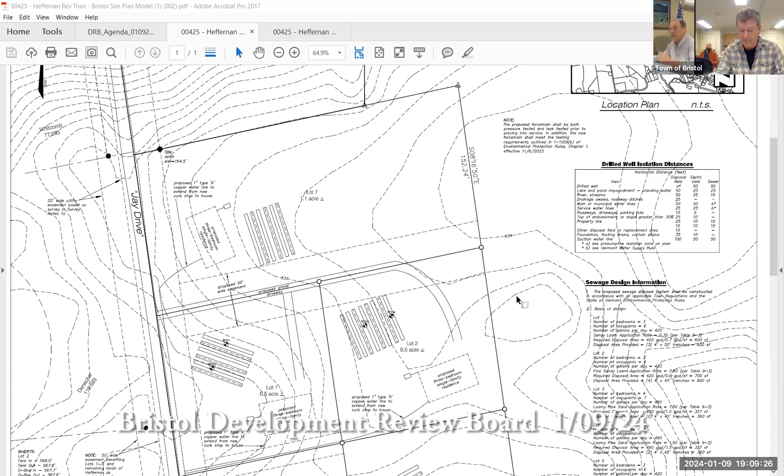As you can see, 2 of the lots will require mound systems, the rest are all conventional. Let me get to those. So the mounds are where? Lot 6, I see, and lot 7. 6 up front and 7 in the back. Yep, just how the soils fell. All right, so Carol, our minute taker, isn't here tonight, she'll be looking at the tape. All right, we'll make sure I forward her all the materials and repeat things too. So, lot 7 and lot 6 are mound systems, the other lots are in-ground, all conventional systems. Yes, okay.

So, as the state requires, they have the proposed building windows, which can alter a little bit, but that's more than likely. Lot 7 might change it, I would think, depending on, as long as it meets the zoning requirements and the state requirements, the state's gonna issue it. Let me just put on the record for Carol that this is in VR, Village Residential District. Minimum lot size in VR is 10,000 square feet, so that's roughly a quarter acre. So all of these lots are of sufficient size. Yes, they're all basically double what they need to be. Yep, and 7 is 4 times.

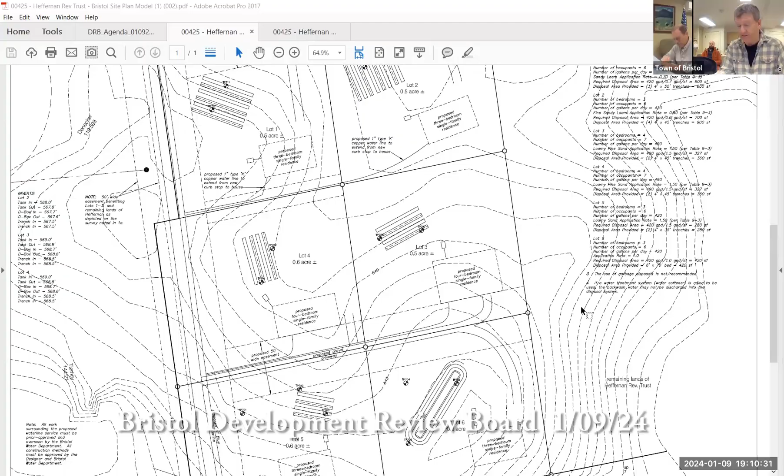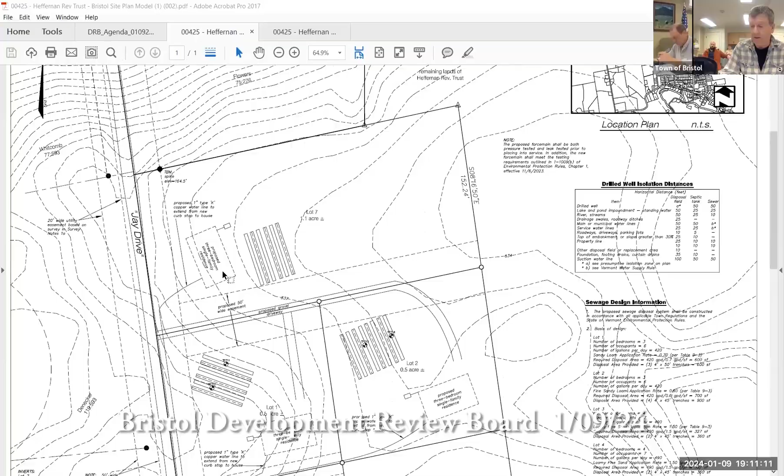Water, we spoke with the water district, which is the selectmen. The selectmen agreed that we can access water from the main that runs down Plank Road. As of now, it's a 4-inch main. The town engineer is reviewing it and will weigh in on if it's sufficient. It's definitely sufficient for these 7. If the other landowners eventually want to subdivide, we're looking down the road for that. So water is basically town water supplied. Has the town said yes? Yes, okay, yep, selectmen, they've approved an allocation, whatever it is.

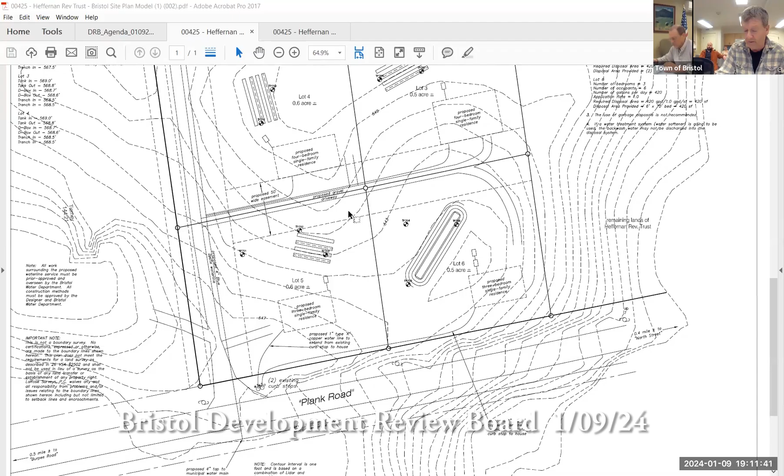Driveways, main access is Jay Drive. And then if you notice between lots 4, 5, 3, and 6, there is a proposed right-of-way and driveway to access those 4 building lots. And then further down, lots 1, 2, and 7, you'll see there is another proposed driveway with a right-of-way to connect those. So we just have one outlet onto Plank Road. Correct. So Steve, the rights of way, they will just be on the lots that they're on with mutual easements to everybody? Correct. Okay, so that basically takes care of driveways and rights of way.

So Jay Drive currently exists, right? Yes, it does. Is it private or public? It's private. I'm curious, Steve, what kind of condition is it in, is it a finished road? It is a gravel road. We built it, Heffernan Excavating built it years ago, and it meets all the requirements that any state road would meet. It's 16 feet wide. It does have a turnaround up top for emergency vehicles, and it's a 50-foot right of way. Okay, got it, thanks. I'm looking for it on the map, that's here.

On the survey map, I believe... yep, I found it. Jay Drive is 50 feet, an existing 50-foot wide right of way.

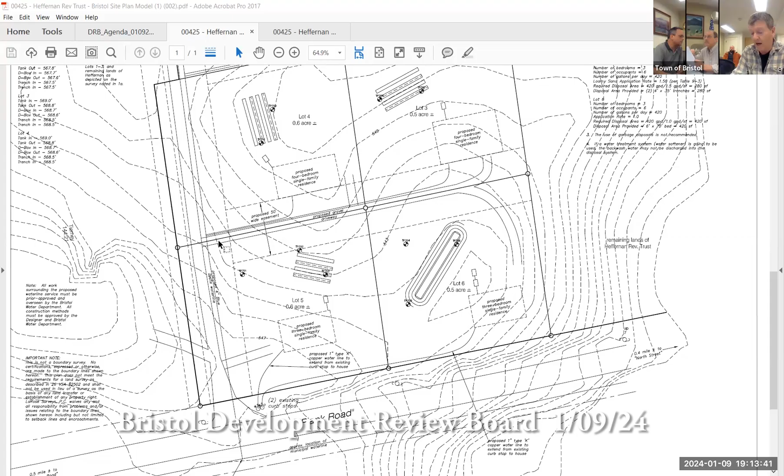The power will run on the west side of Jay Drive. Power will come off and feed between there, underground for lots 1, 2, 3, and 4. If you look at your print, you'll see an easement that will be a water and utility easement, fitting right between the 4 lots, so it can feed power, cable, telephone, and water to those 4 lots.

See right here? There's dash lines, so it's the easement that provides access to 1, 2, and 7. No, 7 is down on it. It's the driveway easement for 1 and 2. It's the easement for 1, 2, 3, and 4 for power and water.

For 2 and 3, because 1 and 4 are right along the road, they'll be in that right of way that the water line is coming up through.

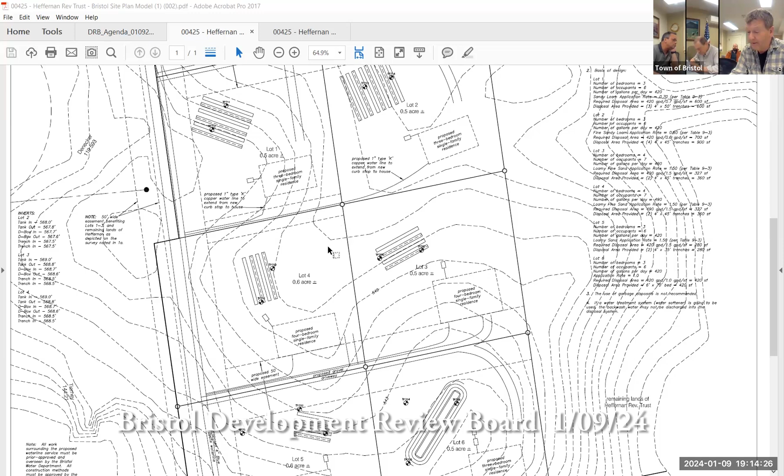That makes sense. So where is it on the survey right now? Where his pointer is? Yeah, it's between 1 and 4. That's just a dash line, and that'll be an easement written into the plan.

I don't think it's on mine. This is a serve— yeah, right here. Oh, I thought his looked different, it looked like extra dashes. No, it's the same little line right here. All right, good enough.

All right, so that is basically water and power. They did this to conform to what Bristol is looking for in the town plan. These lots can be quarter lots, but by the way they look, I doubt they'll ever be—but you never know with the homeowner what they're able to do. As of right now, they're half-acre lots and meet the requirements of the state and the town.

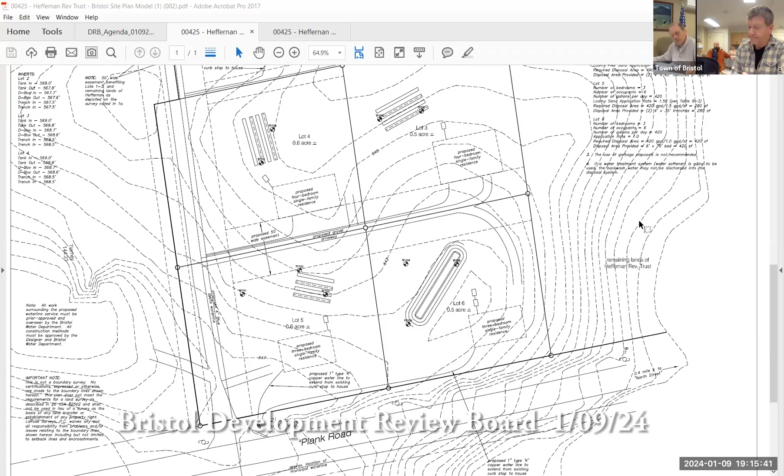Single-family residences. And if you notice, lots 3 and 4 are proposed 4-bedroom houses, where the others are all different.

Which is part of your whole septic plan—everything, it doesn't matter, it meets all state requirements. It's being submitted, but LaRose Survey did it, so that's what you pay them for, to make sure they're meeting all the criteria. So 1, 2, 5, 6, and 7 are 3-bedroom houses proposed, and 3 and 4 are 4-bedroom.

Correct. Okay, does Jay Drive have anything else on it right now?

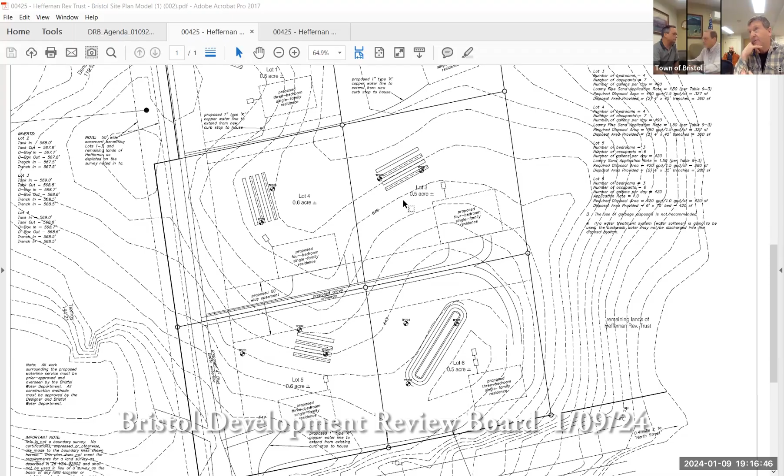Right now there is the Tierney House, which is the very first one as you pull in, then the Denner Residence, then the Whitcomb Rental, and the Flower Residence is at the very end on the opposite side. If you look at lot 7, just above it, that's the Flower Residence. So Whitcomb's on the west and Flower's on the east. Yes, that is correct.

So you're going to need a stormwater permit? LaRose hasn't indicated that yet, but if it is, you'll have to get it. Maybe you don't need it yet, because once the houses are built and the driveways are in, then you've got more impervious area. They haven't mentioned it so far, so you might want to ask them. I truly believe we wouldn't miss that, but we will ask.

Well, it might be a timing thing—it might be before any houses go in or something like that, because you don't know how big the houses and driveways are going to be.

Any questions from the board, Brenda or Tom? Good... oh, we just lost Tom. Seems very clear. Okay, hold on, we lost Tom a little bit. Sure.

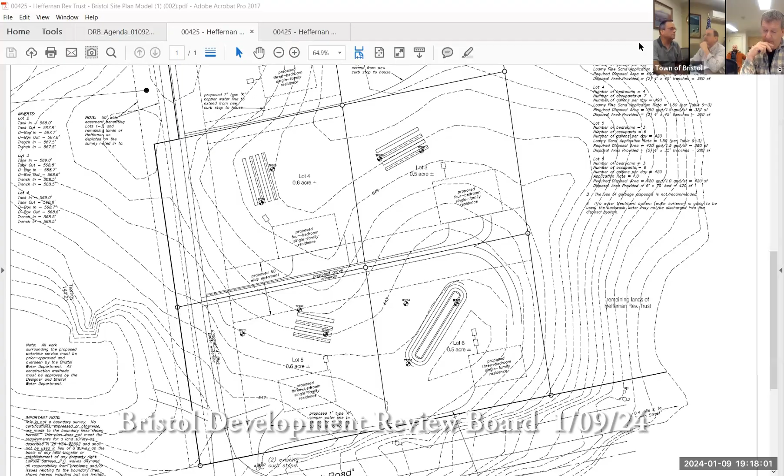Ted, any questions for Steve? No, it's pretty straightforward. And everything's well thought out.

Any questions or comments from the gallery? Anybody online? No, okay, that was just my cursor turning into a hand.

So does anybody feel that there's anything lacking that needs to be put onto the plot plan for the final? Looks good to me. Yeah, I agree. All right, good? And there'll be one more meeting for any concerns, correct?

Right, so the board's happy with the content, no one has any suggestions to add to the final plat. Awesome. Just so you know, Steve, we don't do that often. We almost always have suggestions. Well, that's a good thing.

We try to dot all our i's and cross all our t's to answer any questions you had. No, it looks good, it shows. They should all be so straightforward.

So you're gonna schedule sometime, it'll have to be February, your first meeting in February, because we can't catch the public hearings in time. Okay, so the notice will have to go out.

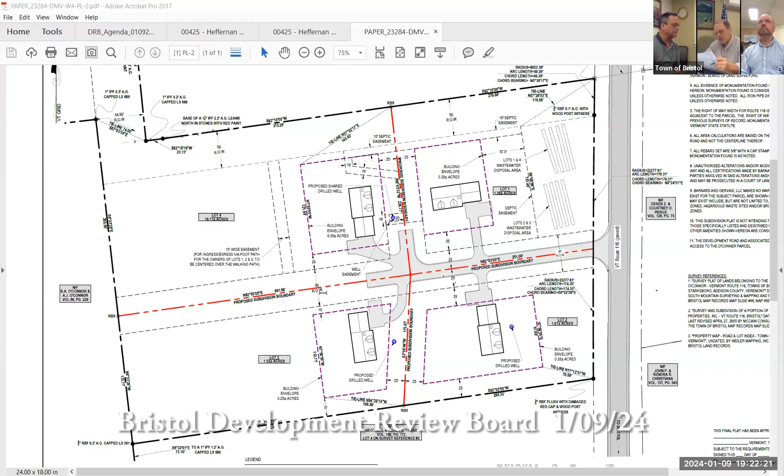So it says the larger 15-foot wide easement for footpath, ingress egress, for owners of lot 1, 2, and 3. You don't need lot 4 because they own it. Yeah. And then we have, well, it should actually say in common with them, so when you do the deed.

Okay, I can have them do that. In common with lot 4, Kevin. Yeah, because lot 4 is using it too. Yep, I mean, they don't technically need to, lot 4 can use it, they can walk anywhere they want.

I know, but you know how it goes, if that becomes the path, you don't want any disputes.

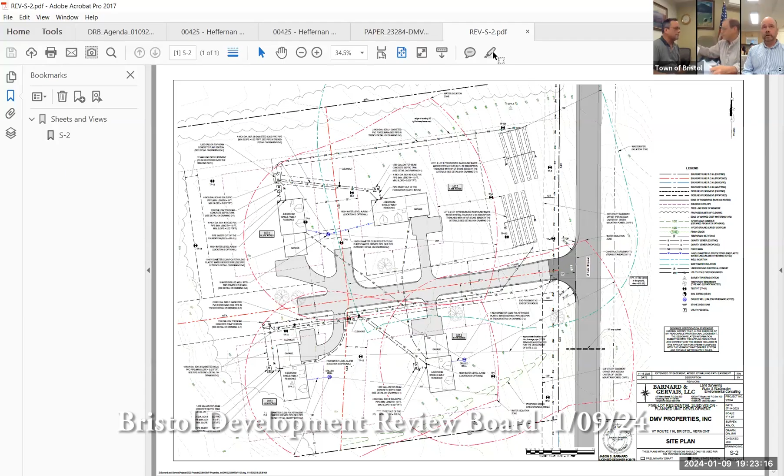I think the S2 will also give you sort of a visual of where it is on the tree line. You can pull that up as well, Chris, if you want to. S2, Carol? And that gives you a better visual, basically it's just to the east of the tree line, where that path would be.

That was one of the questions from last time - was it Tom who asked if it was going through the woods? I think it was Tom. No, this is good, so those are the two changes from last time.

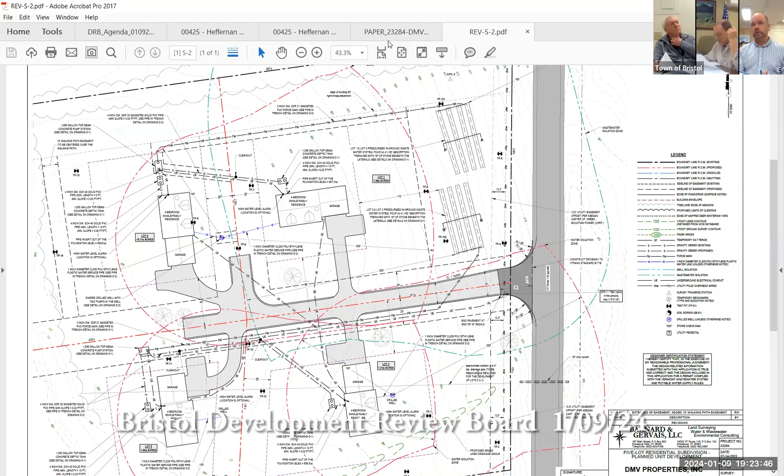Other than that, the state water and wastewater permit has been issued. Our stormwater engineer is working on the stormwater design. You have the stormwater drawings in hand. Everything will be collected along the road, conveyed to a gravel wetland in the back portion of lot 4. Pull that up so we can reference it in their decision.

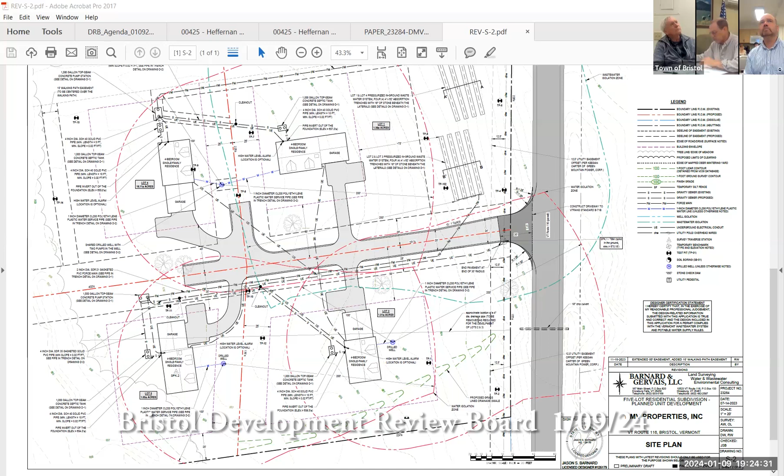That was on S1. Isn't it there, stormwater? Isn't this it? Yeah, S1, SW1. And if you don't have it, I emailed that. Yeah you did, I'm not sure in this folder which is the final. I do have it, I can boot it up if I have it on the laptop. No, I've got it. This one. It was in the preliminary, we may not have resubmitted it because there was no changes to that. It was in the packet, my printed out packet of this set. It's there, okay yeah, is it SW1? Look at that, there it is - took me a minute but I got there.

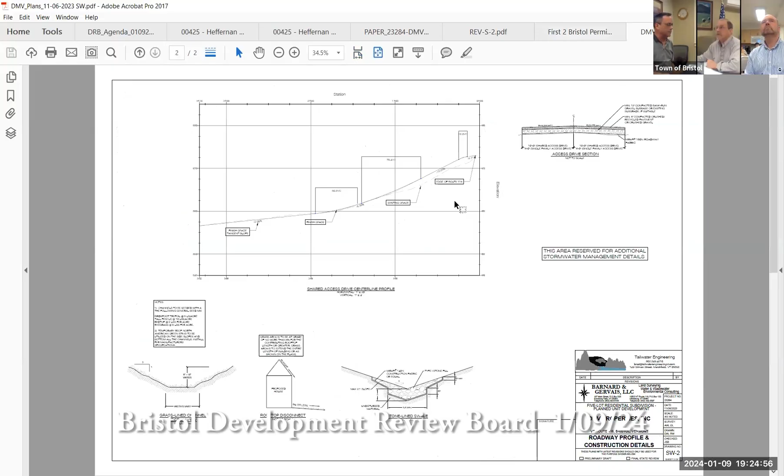So there's the stormwater system, and obviously that path would go along the back side of that, to sort of hug the tree line. Tried to keep lot 4 with as much room out behind as possible before it got to the gravel wetland.

Where's the path, the easement path, in relation to the stormwater? On the west side. It skirts - there's a little bit of grading right there, we're not seeing it, right? Yeah, and the stormwater engineer didn't have that, since we're pretty close to the house in lot 4. Further to the west is that easement. What's the black, that pipe? That's an overflow structure, that will be part of the treatment system.

So it's just like a settling pond basically? It is - there's vegetation, there's a liner, and then that goes out to the wetlands after it's treated. Just by gravity? Yep. Treated just by hanging out in rocks? Yeah, it's residual, so there's actually wetland plants in there that are part of it. You have topsoil in there, so the water goes into the forebay, spills over to the gravel wetland. It sits in there, designed to have a certain volume where it treats the water, cleans it up before it hits the structure, then goes out to the wetland.

So it's a passive system? Yeah, a passive system - once you put it in, they're supposed to be very low maintenance and work fairly well. That's what it's gearing towards now, more or less, gravel wetlands.

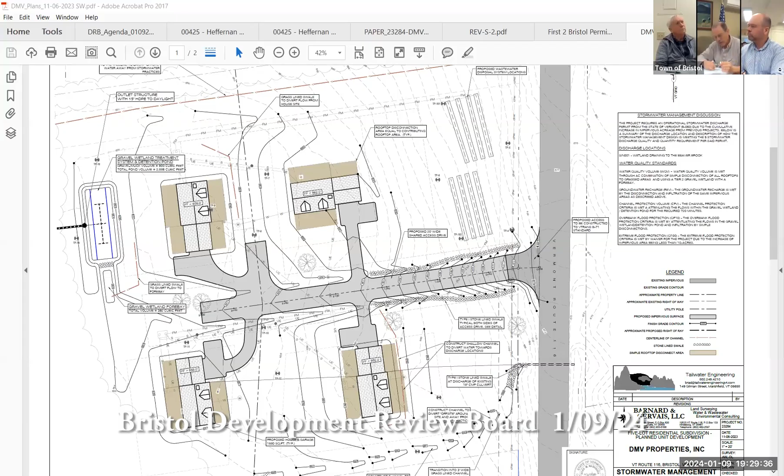So if I remember right, the natural area up into the northwest, that's all part of lot 4. It is, and because lot 4 is 16.11 acres, that's better shown on this.

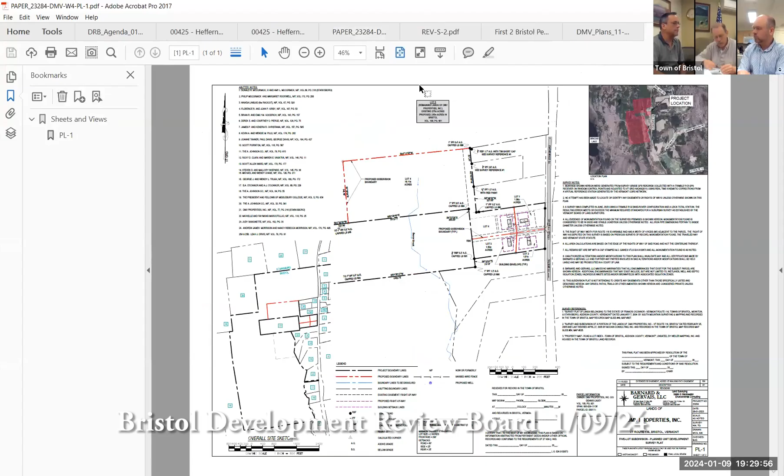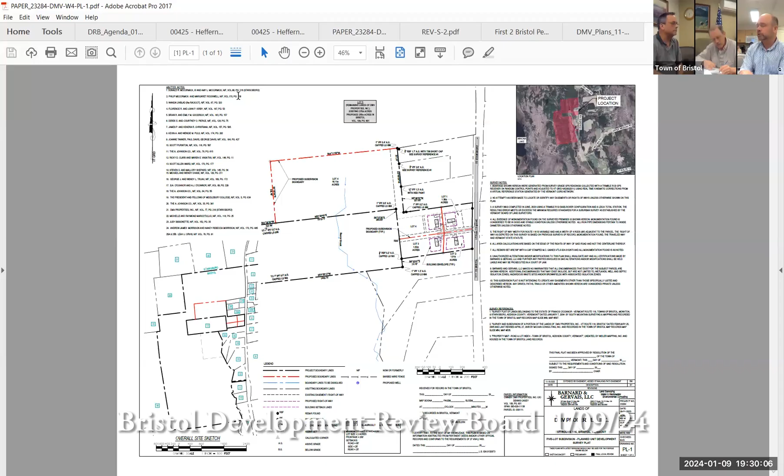The deeds need to provide a common way across lot 4, but it needs to go all the way up and include all the rest of lot 4. They're gonna have the recreation area there for walking paths. But we didn't put easements on there specifically because we don't nail down specific trails on the lot. I'm just saying that the rights of lots 1, 2, and 3 aren't just to walk across lot 4 where depicted - they have shared rights that continue with all the rest of it, and the deed will reflect that. That's what I'm saying - the decision would reflect that, so get that in there.

What's the one you've got up there? This is PL 1. So what are we gonna record here, Chris? PL1 and PL2? Ultimately the two, PL1 and PL2, will be recorded.

That's what I would suggest - yeah, we gotta. Your stormwater drawings will be on file with the state, and the wastewater drawings too. So I think we have to record - we wanna record both. We have to, just based on the size of the lot, we have to capture it. No, I know, and I've gotta sign off on them.

Any other questions, Brenda or Tom, before we turn to the gallery? No questions. Good job. Thank you, keep working with us on this. Brenda, you good? No questions.

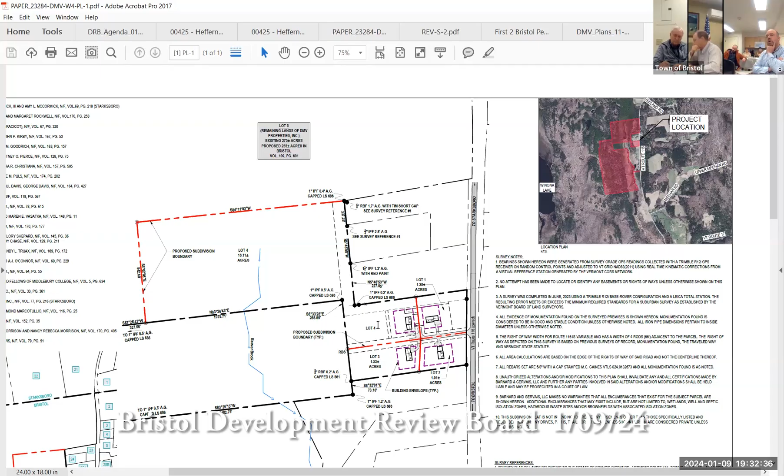So you mentioned this was a division into 5 lots. Right, no it's 4 - 4 new lots, the 5th lot is the remaining one. And it's still labeled as lot 4 though in that diagram - am I seeing that correctly?

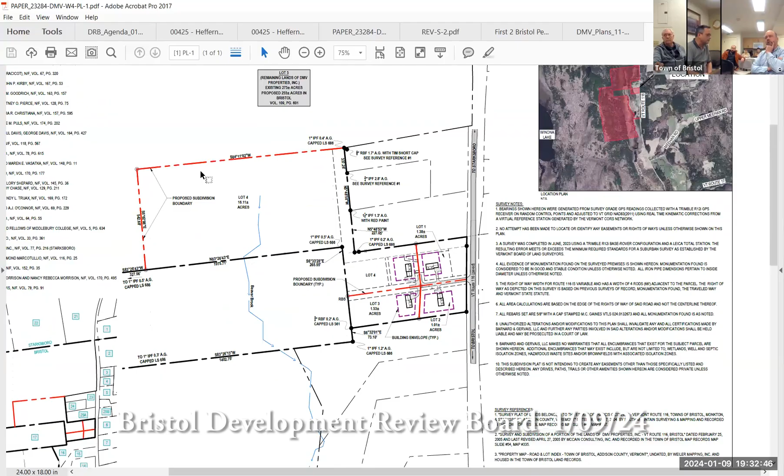No, lot 4 would be behind you. I'm just gonna pull up the map here. So the lower corner of this, Chris will show you, where this red dash is - in this square. This area here is the development part. All of this is the remaining lands, the DMV property zone as well. So that's why it's technically a 5-lot subdivision, because that one large portion isn't part of the retained parcel. But does that make sense?

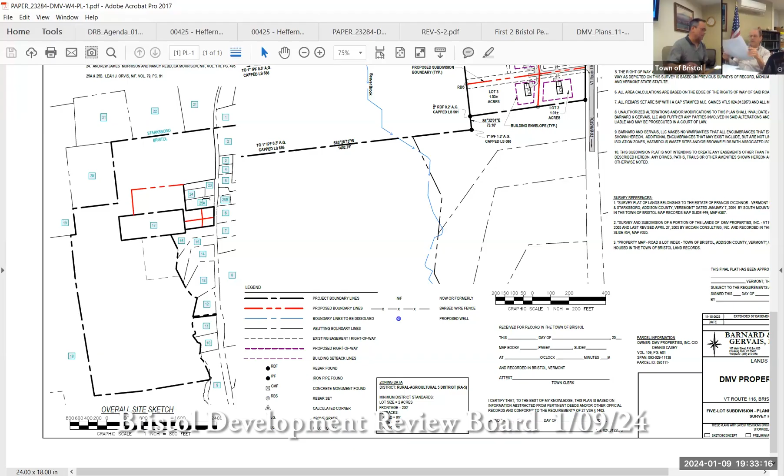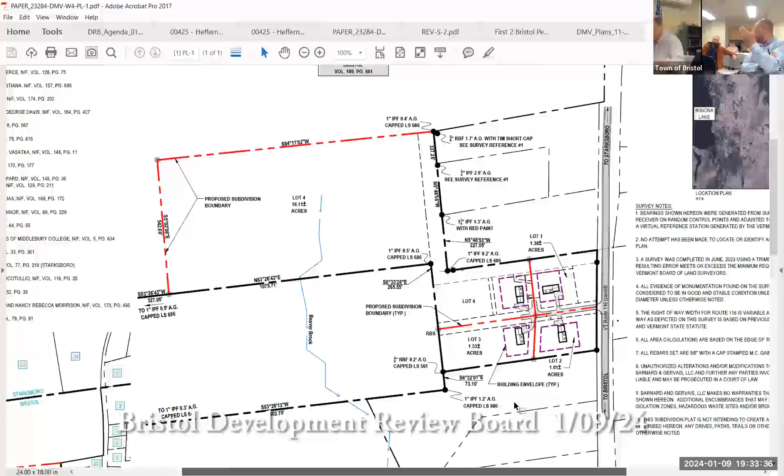Yes, perfect. So back to the questions - what is the nature of the walking path? That was one of the stipulations in the proposal with the original subdivision, for people to be able to access lot 4 and use that to walk, not ride vehicles - this is a walking path on lot 4. It's more or less shared between lots 1, 2, 3, and 4 as a recreation area.

The larger portion of lot 4 is wet. Yes, unless you're building boardwalks, it's inaccessible. Yep, we've been out there with the state wetlands ecologist, we've walked it several times.

Okay, very aware - because it's right behind my tree line as well. So that's obviously my backyard where we play. I'm obviously concerned about potentially people wandering back behind my house. I'm not worried about them coming onto my land, just the fact that there are people walking behind my house is new to this lot. There's currently 300 acres behind me of nobody.

Will there be any shoring up of the existing tree line between the north-south boundary, between lots 1 and 4? The hedgerow there - will any additional hedges or trees be planted? No, the proposal is to leave it as is.

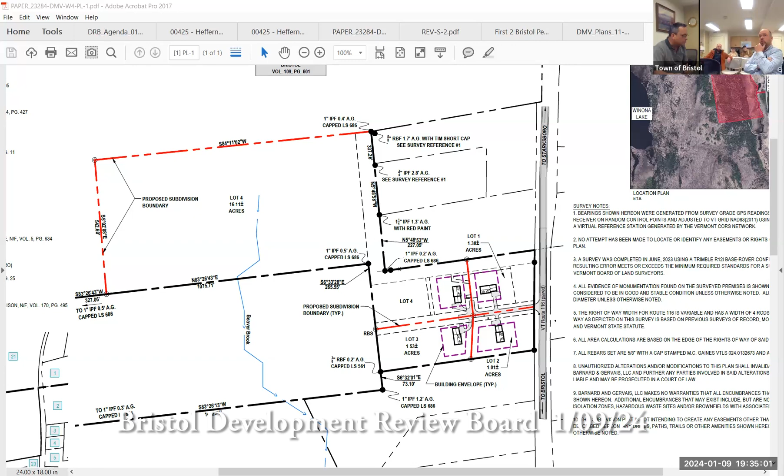Andrew clarifies he's talking about the area to the north, where the squiggly line shows the hedgerow, and the property line runs through it. It's described as a moderately sparsely vegetated hedgerow at this point, but nothing is proposed to change it.

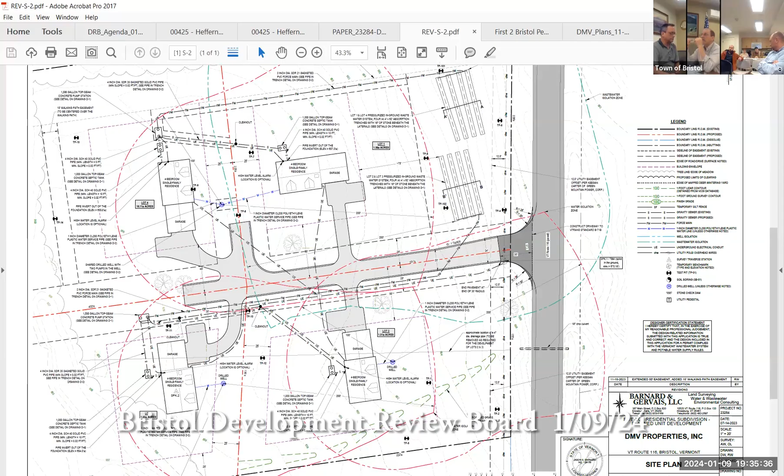What's the nature of the water runoff into that wetland patch - is that just rainwater and stormwater? Correct, that's a stormwater treatment system mandated by the state of Vermont.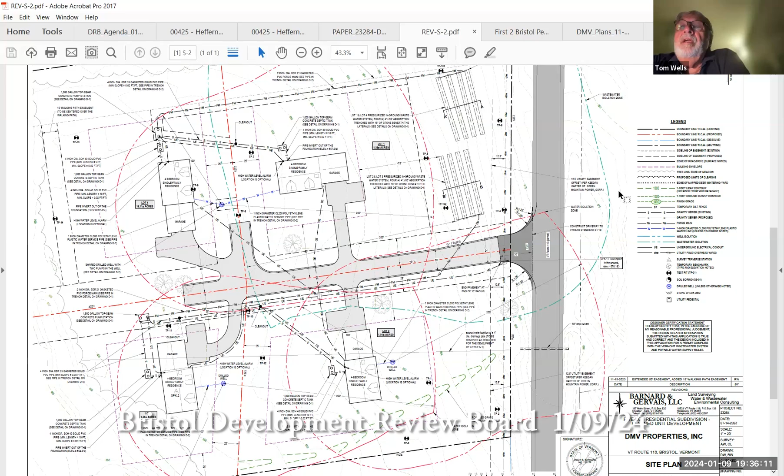Will there be any additional features built on the property other than houses and their own structures - paths, gravel or grass with an easement? Right now it's grass as an easement. On individual lots, once somebody owns them they might put something in their backyard, but nothing is anticipated here other than the building envelopes where the houses are proposed.

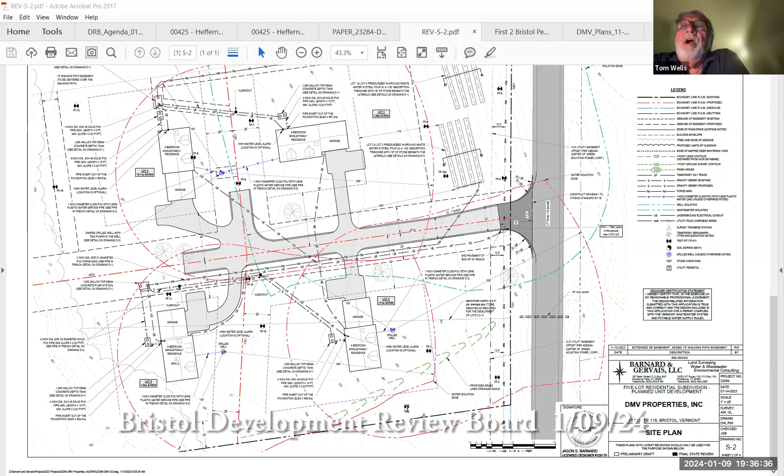Nothing is proposed for the large area behind your property. They're not going to do anything other than allow access to that for all 3 lots, which is part of what they have to do for a planned unit development like they've done here.

Well, this is not the PUD - yeah, because they're smaller than the 5 acres, it's because they're below the 5 acres. We've had so many iterations of this, I lost my place. That's what we got to consider.

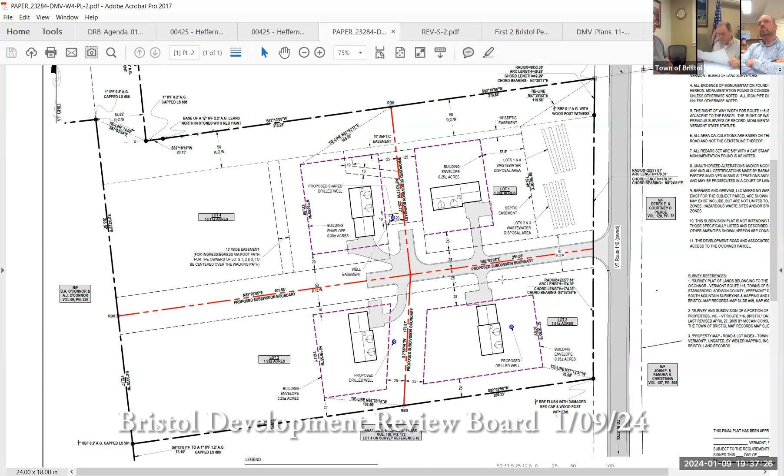I would be surprised if it has any negative impacts at all on your property. It shouldn't - you shouldn't know it's there other than the fact that you'll have some neighbors down the road on 116, or on their own road. It's a wide open view, and that's my concern. Yeah, for sure.

Particularly the lot in between - if that goes up for sale, I'm out about 50 trees I'll need to plant, just to maintain some separation.

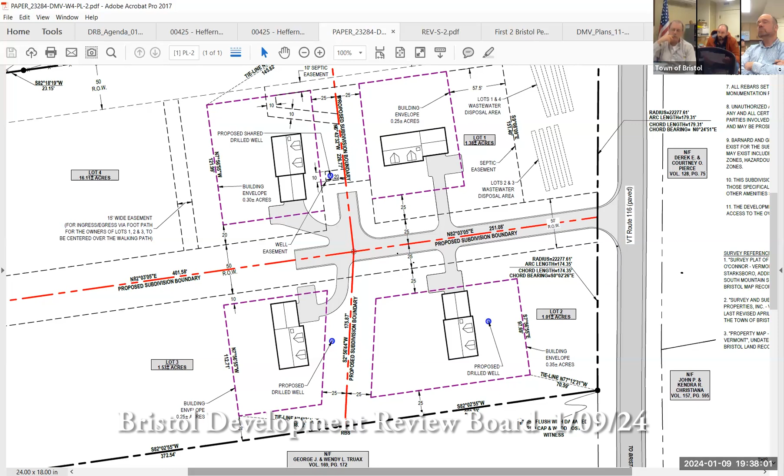Where's your driveway, Andrew? It's across the street from the Rose property, directly off of 116. So he's north of actually the landowner between - she's the landlord.

So here's probably the best view - this is you, right? Correct. But that lot in between is not part of this developer. I understand.

Keep in mind, I've got to go home and answer questions to my wife. Oh yeah, you better be taking good notes, I need to know everything. Well, luckily it's on local access.

So anything else, Andrew? Are there already plans for development, or is this purely just to be able to divide? This is just to be able to divide as far as this board's concerned - they're proposed single family homes. Is there any developer ready to take interest, or is this something else?

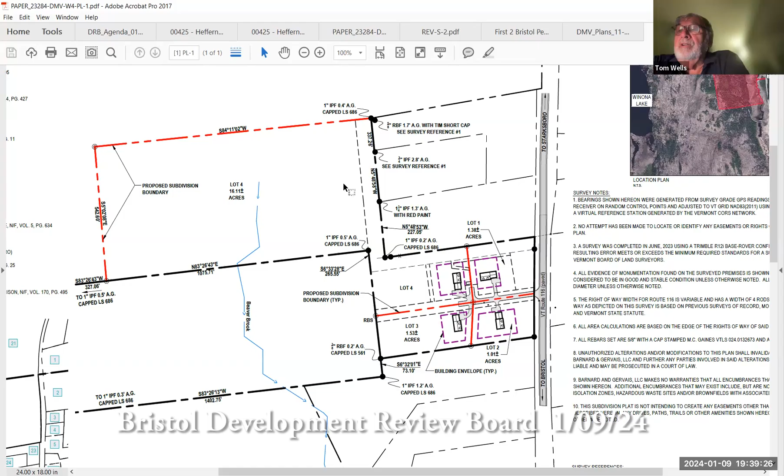The lots haven't sold yet - they can't sell as a lot until this goes through. I understand, but I know developers will keep an ear out. I think you can assume they're ultimately going to have somebody that needs these 4 lots to be able to sell, yes.

So at the moment, there's no developers waiting for this to go through. I hope they are - I hope for your estate someone wants to buy it. Yeah.

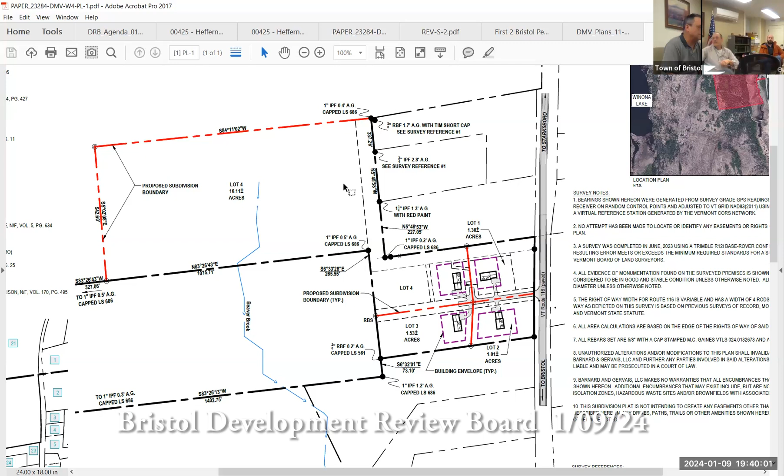That answers my questions for now. You folks have nothing at this point? I forgot your name - Leah. Hi again, we're getting to know each other. Any questions? No, not at this time. Anything else from Tom, Brenda, or Ted? No? Anything from anyone online? No, okay.

Take a motion. I motion that we approve the proposal. Second. Yes.

Let's take a vote on that, but then I have something to add. Any further discussion on the motion to approve? Jason's been real good about dealing with the various concerns, and I think they're all in the plans. I don't think we have any outstanding conditions, do we?

Well, we can talk about it now. I think I'm gonna want to see on PL 1 — we want to say something about this being the common easement, open space area for the other lots. We need a reference on the plat for that. We'll have a note, see note, someplace, because this is what's going in the land record, this is what people are gonna see, rather than trying to find deeds in the land record to see if the right things got stuck in the deeds.